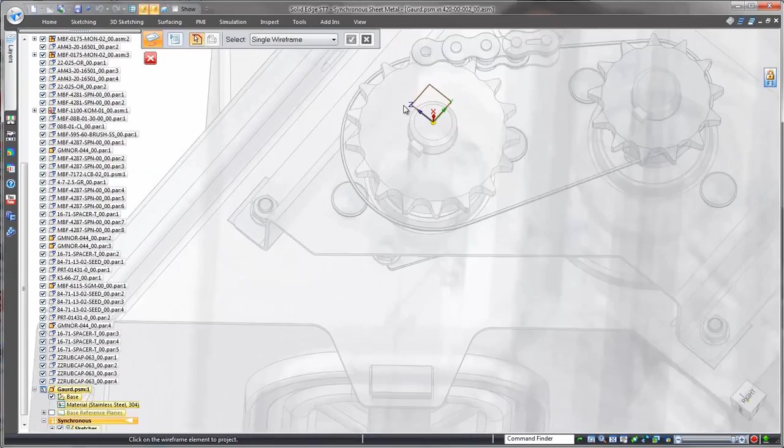Solid Edge excels with large product structures, and designers can work efficiently in the context of thousands of surrounding components by quickly focusing on a subset of the overall product. Here, watch as construction of the safety guard begins as a sketch, referencing geometry from the adjacent product structure.

Once we have a region encompassed by these curves, we select it to create a sheet metal tab. Solid Edge automatically assumes that a tab is the basis for sheet metal work, so no specific command is needed.

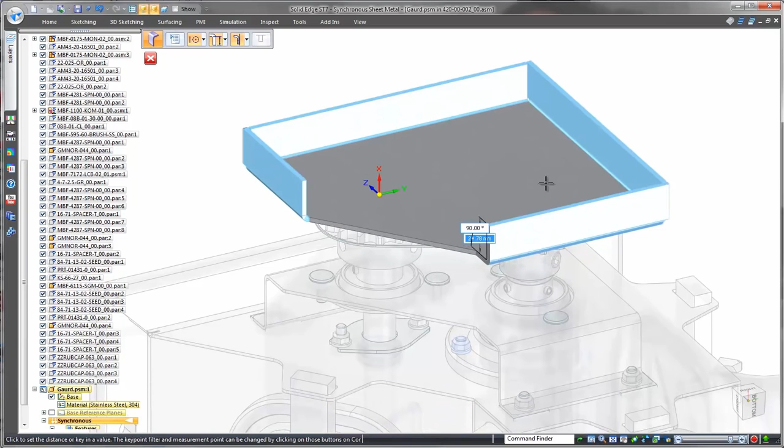Continuing to lean on the inherent intelligence within Solid Edge, we'll create four flanges by selecting and simultaneously dragging appropriate thickness faces, using a corner point from another component to define the flange length. Again, work directly with geometry. That's creation in Solid Edge.

We'll quickly define a jog to prevent interference. Solid Edge commands are intuitive and fast. Partial flanges can be defined and customized via the innovative heads-up command interface.

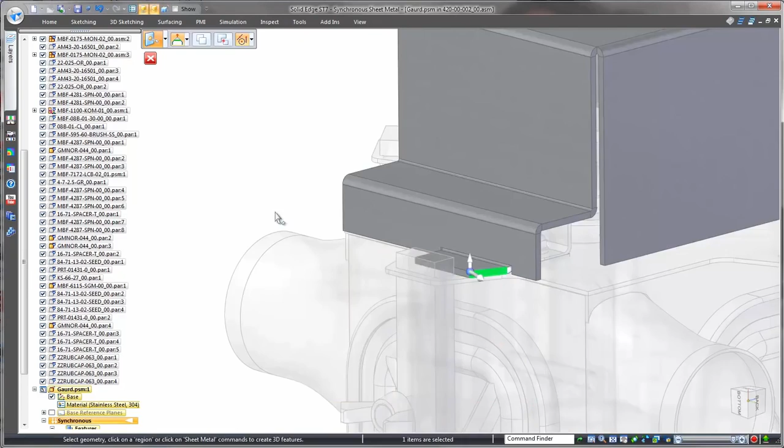Design intent is incorporated by relating faces. When flange sides need to match those from adjacent components, the handy radial menu initiates a simple sequence of picks to get the job done.

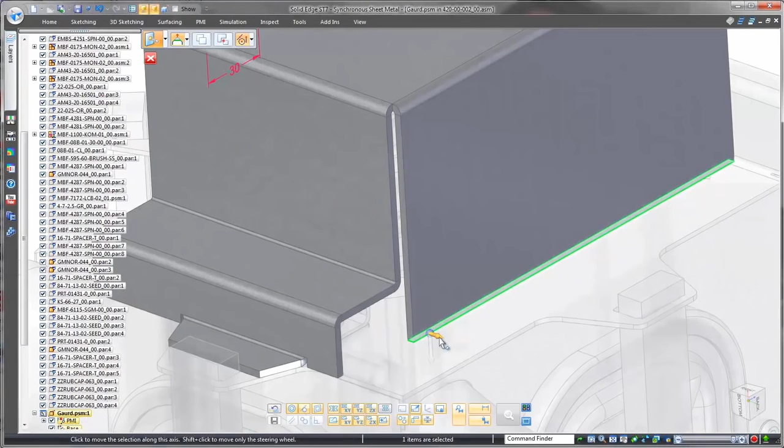Solid Edge makes easy work of reorienting and extending flanges, often removing the need to measure angles and distances. For visual face modification, the handy steering wheel is always available. And when driving dimensions are necessary, it's easy to place them on the 3D geometry and change them as needed.

Using surrounding geometry, creating sheet metal features like this dimple is fast and accurate.

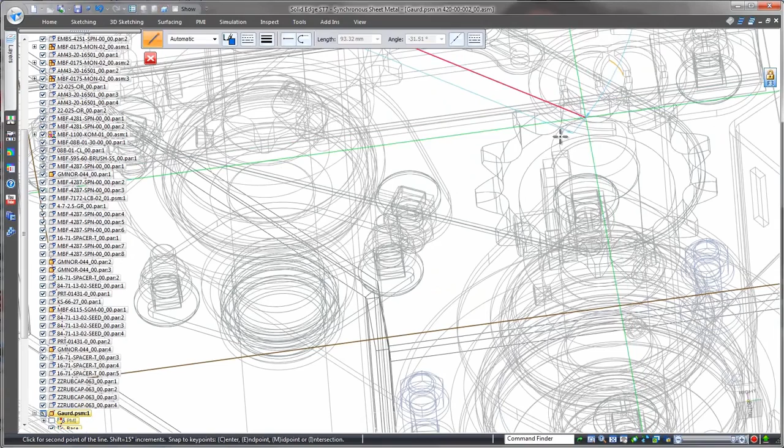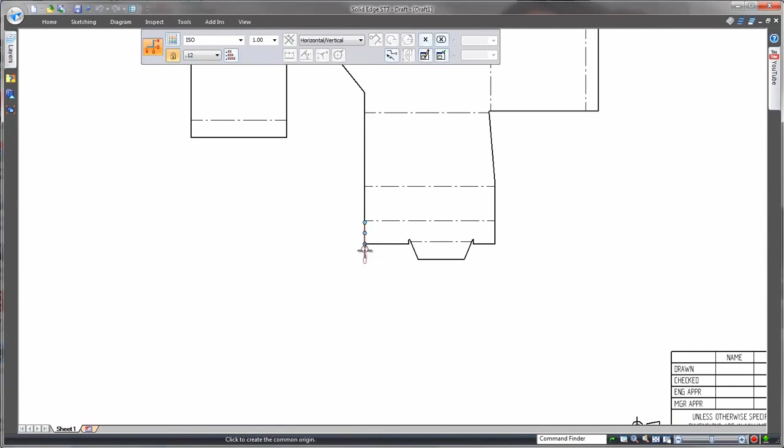For manufacturing purposes, Solid Edge flat patterns always show the most efficient cut sheet size, and that's great for nesting. The Solid Edge drafting tools facilitate creation of dimensioned drawing views fully associative to the model.

Note that as we close the drawing and return to the assembly, the guard is placed in all three locations in the meter box. Solid Edge contains a full set of sheet metal construction commands. Watch as a rectangular to circular plenum in the blower fan assembly is lofted between existing parts.

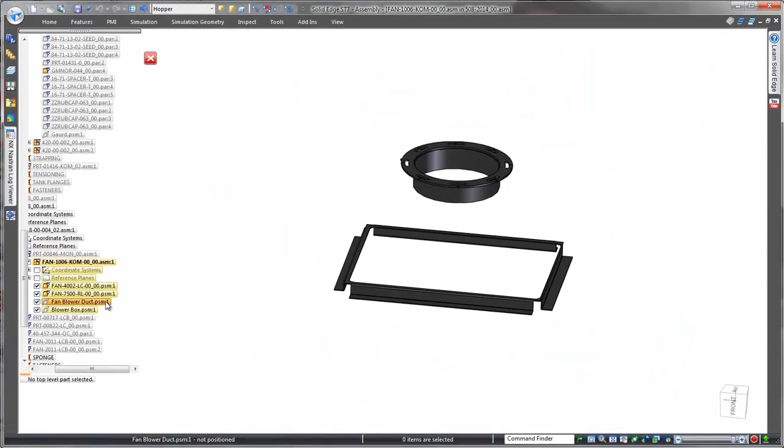Another strength of Solid Edge is the ability to wrap sheet metal around a solid part. This conversion of solid block into sheet metal is especially useful for complex shapes, as solid modeling is often faster and easier. Now that's productive.

To integrate with your CNC machinery, Solid Edge flat patterns can be exported into a DXF format with intelligent layer control.

Direct interaction with surrounding geometry, coupled with industry-leading design tools and innovative modeling capabilities, makes Solid Edge the choice for companies looking for an edge over the competition.

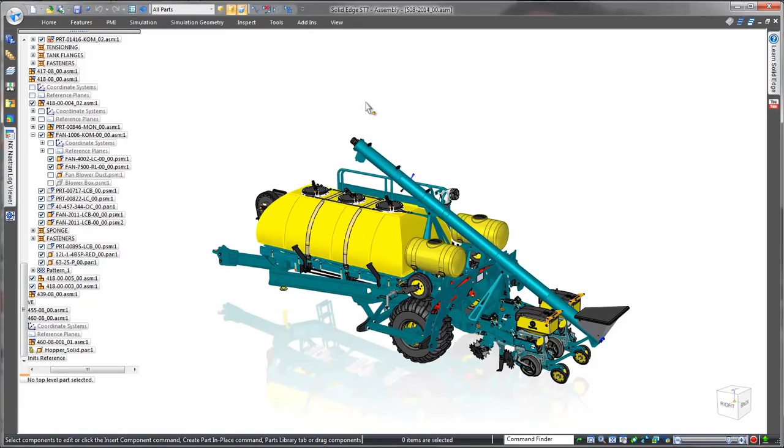Solid Edge. Design better.